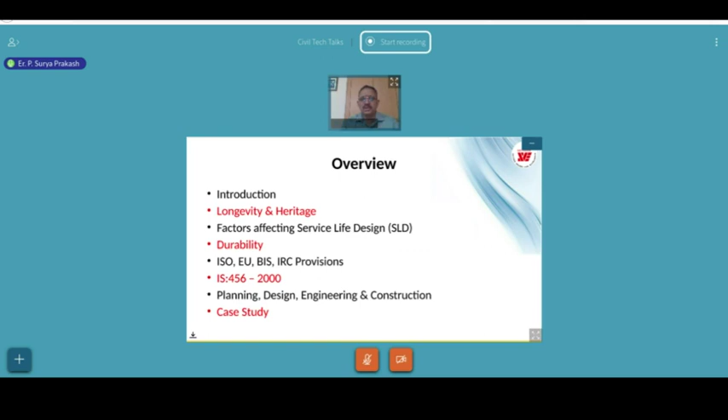That means perfectly being able to design a particular given life of the structures by defining the specification and the structural systems and materials for achieving that lifespan of the structure. This is the challenge before us. So I'll be covering these aspects, and I also give a small case study of a project where we have worked out the specifications, what all to be covered. We have 1 hour time, and I'll try to cover as much as possible in this time.

So early 20th century, when reinforced cement concrete is evolving, 1903 and all, where theory is still not fully developed, people still started constructing buildings in reinforced concrete. We had concrete before that, but reinforced concrete as a concept started evolving in the 20th century, and people got excited with that concept of reinforcing the concrete because people found concrete a strong material for compression, but weak in tension, as we all know.

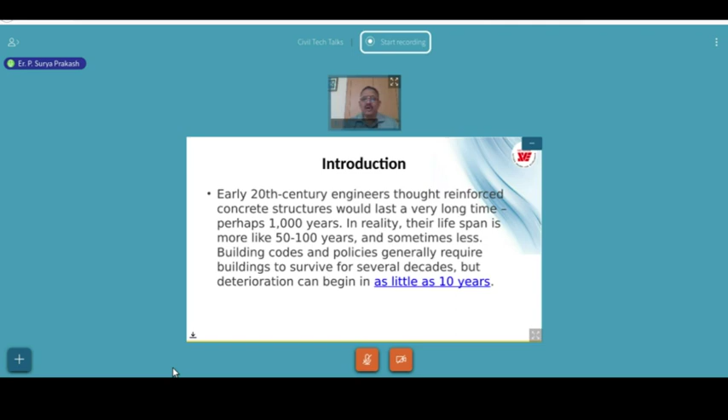Once they got this idea of reinforcing concrete, they thought they could build structures which would live for 1,000 years perhaps. But in reality, we are seeing lifespan is limited to between 50 and 100 years if they are well maintained, and if they are not well maintained, even less than 50 years. And we are seeing many buildings collapsing even during construction without proper construction methods. So today I'll be covering these aspects of the lifespan of reinforced concrete structures.

So what are the structural forms or forces that affect the life of a structure? The oldest structures standing are pyramids, and the pyramid is a natural structure where we have only down thrust, and there cannot be overturning in a pyramid. They are very stable, and load dispersion is by natural means. That's why we have pyramids standing for 5,000 years. And we have stupas in India, temples, which are also close to the pyramid, but taller and more slender compared to the Egyptian pyramids.

But temple construction is so well defined. There is no eccentricity in the construction, and the dimensional stability and symmetry are all predefined, and they do this construction religiously. That is why we see many structures in India also. In fact, if you compare worldwide structures and India, India has almost an equal number of heritage structures standing more than 1,000 years and more than 2,000 years.

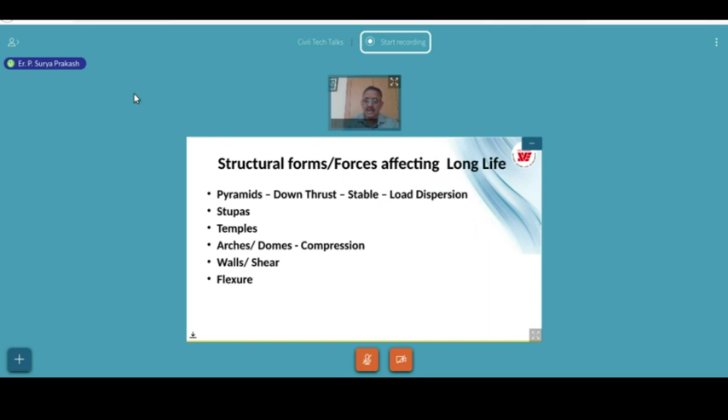Next, coming to the present scenario, in the last 2 or 3 centuries we have evolved structural systems from arches, pure compression systems, dome spatial structures, which are pure in compression because there was no concept of reinforcement. And now the latest, we have very tall structures with shear walls and framed tube kinds of structural systems, which can also handle flexure. The challenge when we handle flexure is handling the crack width in the tension zone, and also the shear. So this is the challenge we have to discuss today, how to design long life for these structural forms and the forces we are estimating.

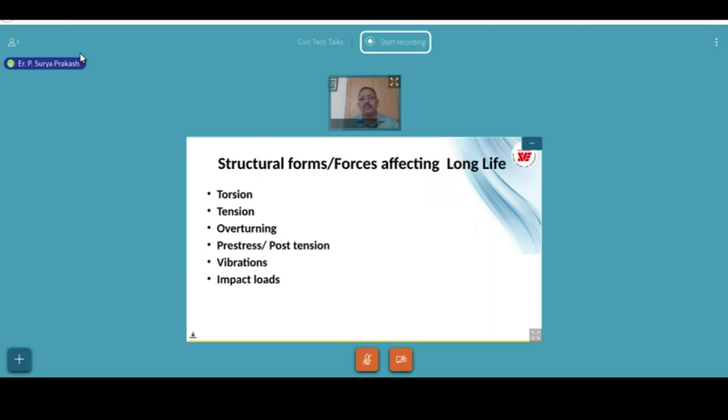As we are advancing, we are also tackling torsion, tension with tensile structures, and overturning moment by anchorages. We have further advanced to pre-stressing and post-tensioning, and we are handling loads from static loads to vibration loads and impact loads. So this is the challenge before engineers: considering all these forces, materials and structural systems, we should still be able to design a life for the structure.

The loads that we deal with are self-weight, imposed dead loads, live loads, moving loads, wind loads, earthquake. And the challenge when we design for a long life is the return period of these loads. We are seeing fast-changing loads, wind, rain or earthquake. The frequency of occurrence of the highest wind loads and highest seismic loads is changing very fast. We had a revision of IS 1893 for seismic in 2002, and now in 2016 it was revised with new provisions.

Imagine a structure designed some 30 years back; it has to be retrofitted. Without retrofitting, how can anybody ensure the life of that structure? And in the current scenario, we have to consider the return period of these 100-year peak wind loads, seismic or rainfall. So the question of reliability comes into the picture in design.

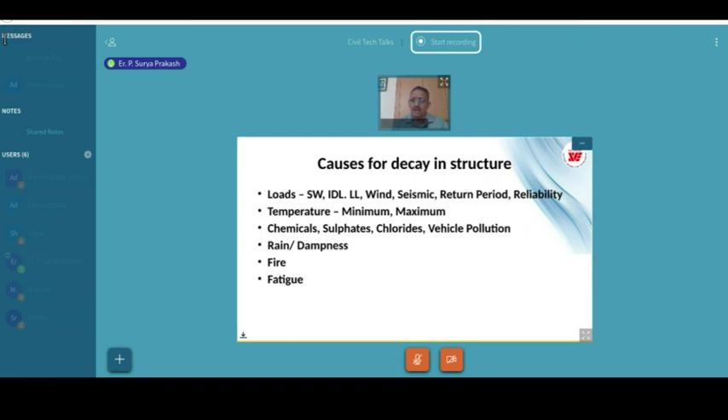And fire. Fire is another incident that can largely affect the life of a structure. Though it comes as an accident, if we are designing life, we have to cater to these accidents. And fatigue from the reversal of stresses due to wind or moving loads also has to be factored in when we talk about the life of the structure.

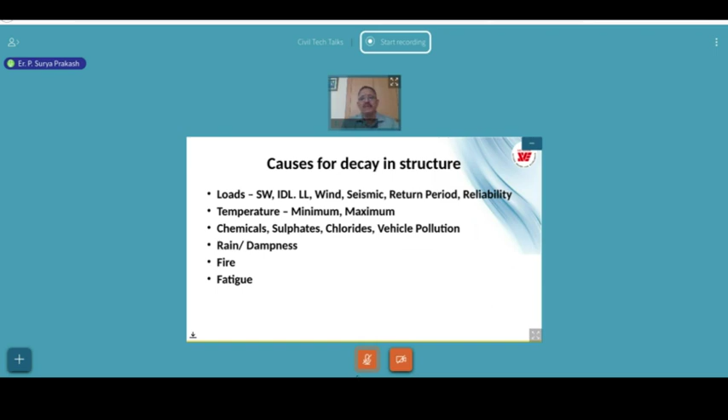Next is soil settlements. We have to take into account the allowable settlements that we consider while calculating the safe bearing capacity, and the creep and shrinkage of concrete. Because we are talking about the life of concrete structures, the effects of creep and shrinkage also have to be accounted for while designing the life of the structure. And a major problem we are seeing nowadays in most buildings is embedded conduits in structural elements, whether columns, beams or slabs.

We have electrical and plumbing lines being embedded, and they collect the water into these conduits, and the leakage of these joints also largely. So this has to be also thought about when we talk about the design life of the structure. And lack of weatherproofing, because we have seen the effect of temperature. So to tackle the effect of temperature, we have to weatherproof the buildings, primarily the terrace, which is exposed, and also the facade, walls or structural elements that are exposed on the sides.

Next important is the soil contamination, and we have to check the level of contamination or possible contamination that can happen during the life of the structure. And earth pressure: in case of deep basements being constructed nowadays, we have to also take care of the earth pressure, variations in the earth pressure, and overburden pressures on the side earth pressure on the retaining walls, because the life of the structure is also dependent on these aspects of containing the dampness entering

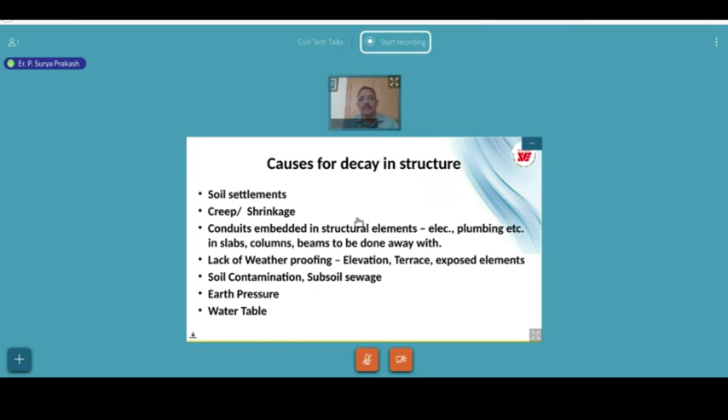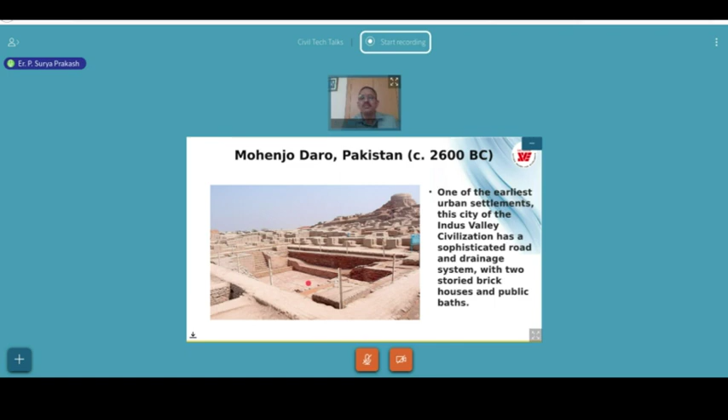So let us examine what are all the factors that could give long life to these structures. Next is Mohenjo-daro, the Indus civilization, 2600. There also they have used bricks and stone in the construction. Because they were buried due to earthquakes or river floods, they have excavated and found this great civilization, which is more than 4,600 years old now. So this is the structure which could withstand. So we can say that masonry structures can also withstand. You can see it is a swimming pool which was constructed.

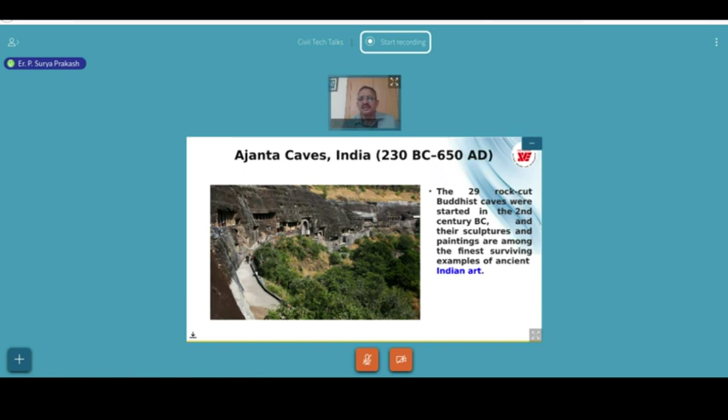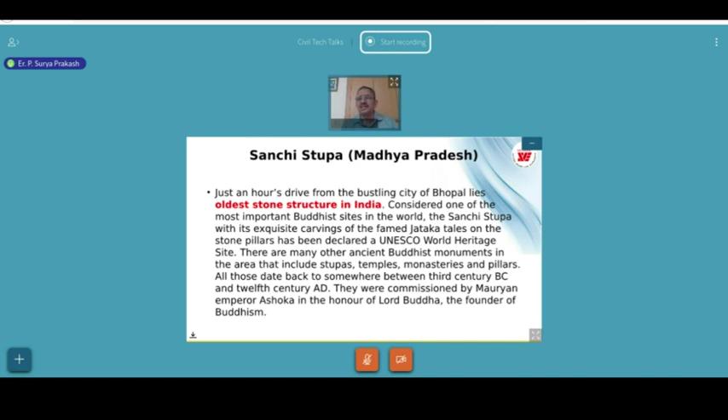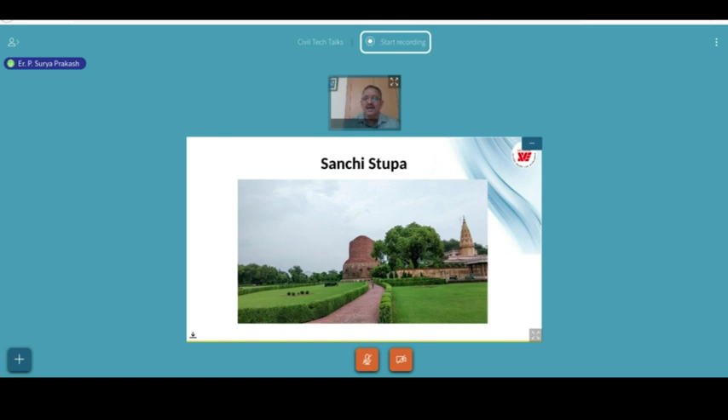That is the Sanchi Stupa in Madhya Pradesh, the oldest stone structure. It is near Bhopal, and it is also a UNESCO heritage structure. So this is the structure. You can see the stupa. It's like a dome and wall kind of construction, which was constructed more than 2,000 years ago. And this is the dome again. This is a beautiful construction that happened more than 2,000 years ago. And it is a Buddhist stupa in India.

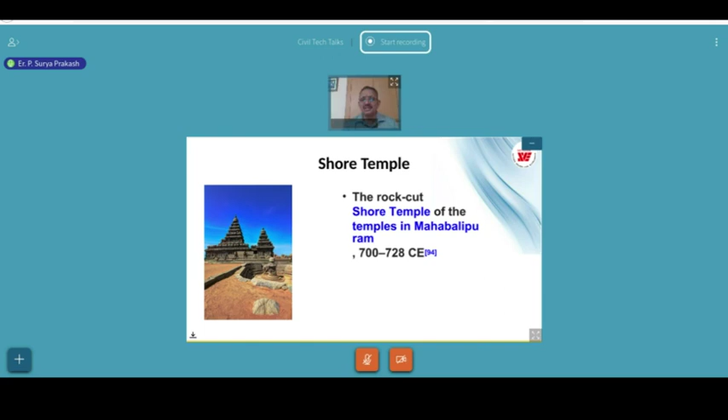Next is the Shore Temple in Mahabalipuram. This is also a single stone rock-cut temple, constructed in the 7th or 8th century period, and is still standing. We also have so many other temples like Madurai, but I'm showing some of the interesting ones, like the Khajuraho temple. This was also constructed more than 1,000 years back.

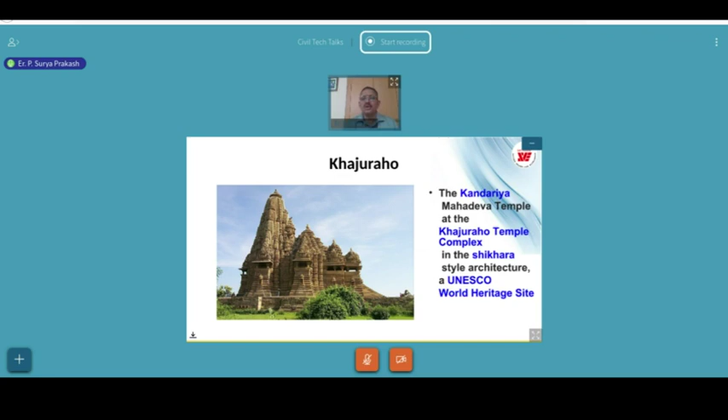Now let us come to RCC buildings, serving life more than 100 years. So what are the structures? The oldest high-rise structure that is standing in the world is Ingalls Building in Cincinnati, Ohio State. It was constructed in 1903. This is a 16-story building in reinforced cement concrete, when the theory of reinforced concrete was still not developed fully, the stress theory and all that, but still they have constructed it, and it is longest standing.

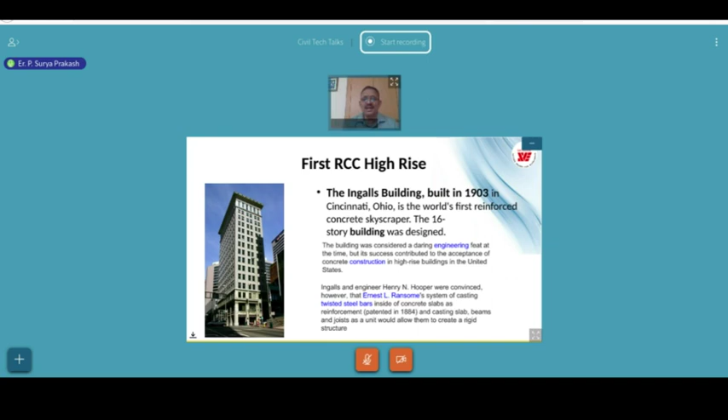So if you want to think of a reinforced concrete building which is living for more than 100 years, this is the best example which we have. And they have done the reinforcement in a different way. What we detail now is not the method they have followed. I will use the word crude way of reinforcing the concrete they have adopted, but still it is standing more than 115 years.

So this is the first RCC high-rise building, with column sizes of 760 mm or 30 inches. And the amount of concrete produced during construction those days was 76 cubic meters in a 10-hour shift. Now we are able to produce this kind of concrete in 1 hour, but definitely it may not be of that quality.

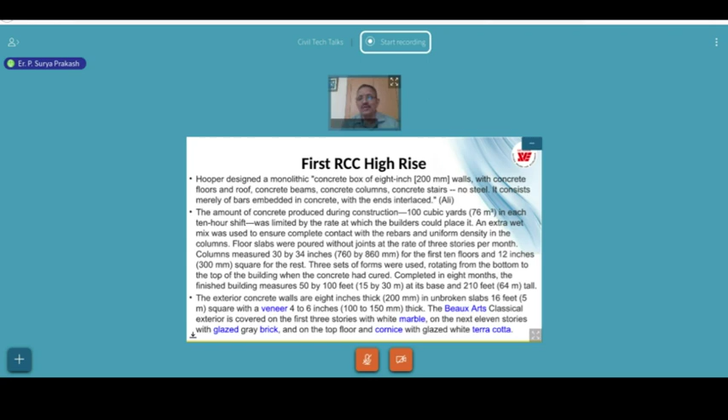So now let us look at what is service life design. Service life design in India, what are the Indian codes that we have, and what are the factors affecting it. Climate change: that's the challenge for engineers, to predict what the climate condition is going to be after 20 years. It could be better, it could be worse, because IPCC is working on improving climate change, but still we have to keep our fingers crossed to see to what extent we are going to damage our environment or improve it, or bring it back to the original state of 50 years back.

And probability is the biggest thing in estimating the life of a structure. So we have to estimate the deterioration in the quality of concrete, deterioration of the reinforcement by corrosion, the materials we are using, whether aggregates, fine aggregates, coarse aggregates, or cementitious materials, and the technology we are using for construction. That is very important, because the quality of concrete depends on the method of mixing, transporting, placing, compacting, and curing, all these steps. That is the most vital element in design life or service life design of the structure.

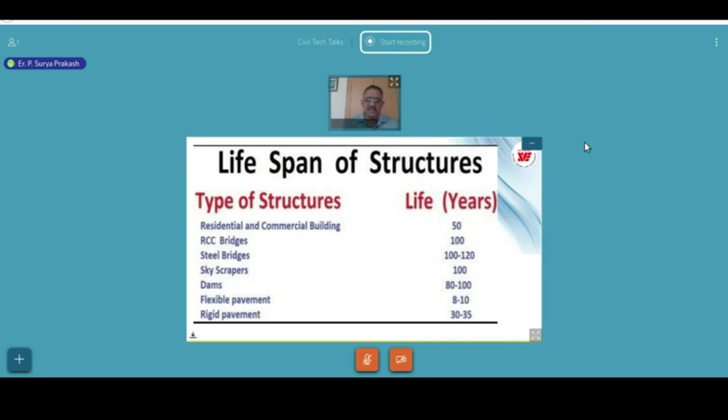And fortunately, the Bureau of Indian Standards is revising IS 456 to incorporate the service life design of the structures. So the design life or design service life or service life design of a building or other structure or components is the period of use as intended by the designer, after which it may need to be replaced, or before this period has lapsed, it should remain fit for purpose. Fit for purpose means if I have designed a residential apartment, people should be able to live in that apartment without leakages, without cracks, without an unsafe feeling in the structure.

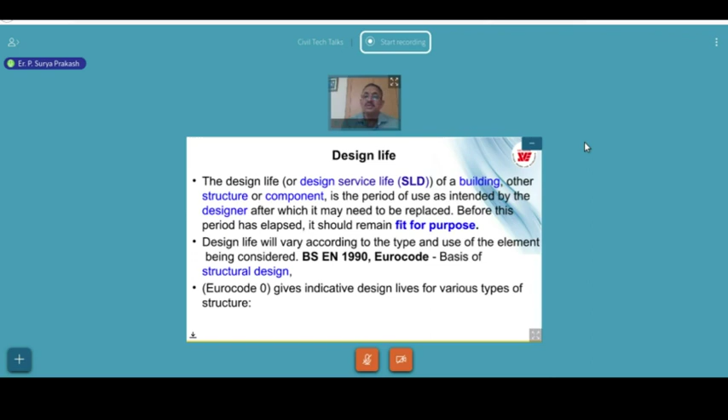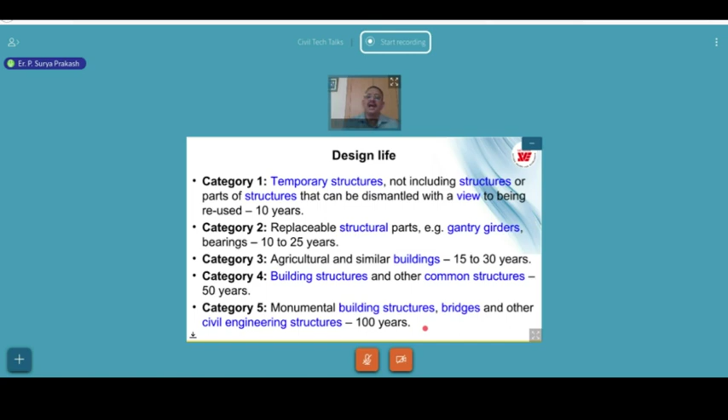The factors affecting design life. The design life may be affected by environmental factors such as moisture, humidity, and rain. These are considered in our IS 456 at present in the exposure conditions: mild exposure, severe exposure, extreme exposure, and all. Next is the wind, the kind of wind loads, the frequency of occurrence of these wind loads, and then temperature; the expansion joints or contraction joints that we provide in the structures and the treatment of these expansion joints also affect the life of structure. And the pollution: air pollution, the quality of air, the pollution in the water in the subsoil, the pollution in the soil.

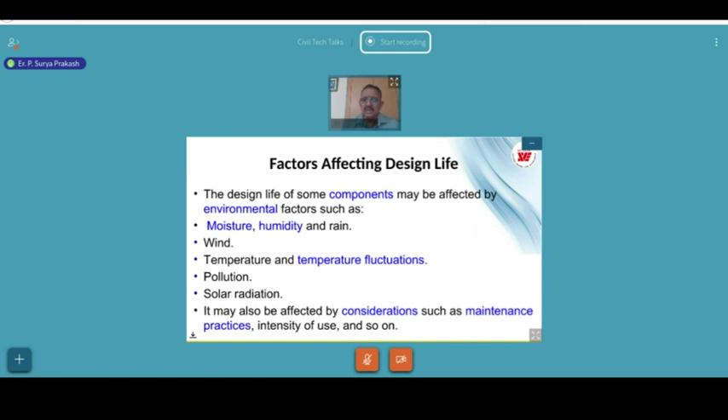And the next important factor that affects is solar radiation. All these we are not considering in the design, but considering the grade of this pollution or grade of solar radiation, we have the provisions for providing cover or quality of material that we decide based on these factors, so that we will extend the life of the structure. It may also be affected by considerations such as maintenance practices, intensity of use, and other factors. So this is what affects the design life.

Who guarantees design life of a structure? Is it the engineer? Is it the builder? Or is it the contractor? Or is it the user? In fact, it is a combination of all. There is no legally agreed definition of design life. In fact, there is not even a legally agreed definition of design. So if it is to be included in contract documentation as a performance requirement, that is a performance guarantee, we have to incorporate it in the contract. So it is important that it is carefully defined within the contract document and that it is consistent with all other requirements of the contract documents.

So in the contract, if we say that this structure has to live for 100 years, as designers, as planners, we have to define the specifications and construction methods that will ensure the life of structure. And apart from that, we must put conditions in the contract such that the documentation of the quality is maintained as envisaged in the design life. And then post completion of construction, during the handing over, the life of structure can be ensured only by proper maintenance, periodic checks, and monitoring of the structure.

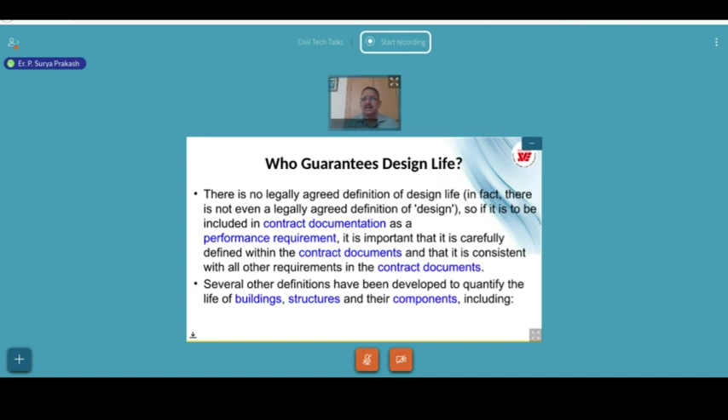So there are many other definitions for quantifying the life of buildings or structures and their components, including required life. What is the required life of a structure? Let us talk about it.

Suppose an independent house where we live. We are seeing technology is changing so fast, and the appliances are changing, automation is changing. So what is the minimum required life of the structure? And what is the cost of structure versus other things? Is it viable to design a structure like if I spend 800 rupees per square feet for the structure, is it worthwhile spending another 400 rupees to extend the life of structure to 100 years? Is it worth it? So what is the required life that we have to define?

What is the technical life of structure? That is serviceability requirement. We have limit of serviceability.

Functional life again is linked to serviceability, but the limit state of serviceability is only the design. When it comes to functional life, there should not be rainwater dripping, there should not be sunlight directly coming into the building. That means the roof has to be intact. The flooring has to be at proper level, with slope so that dampness and water will flow. All this maintainability, that is the functional life.

What is the economic life of the structure? So that also we have to define. And what is finally service life? Service life is from the day we hand over the structure to the user to the day we decide to dismantle the structure. That is the service life.

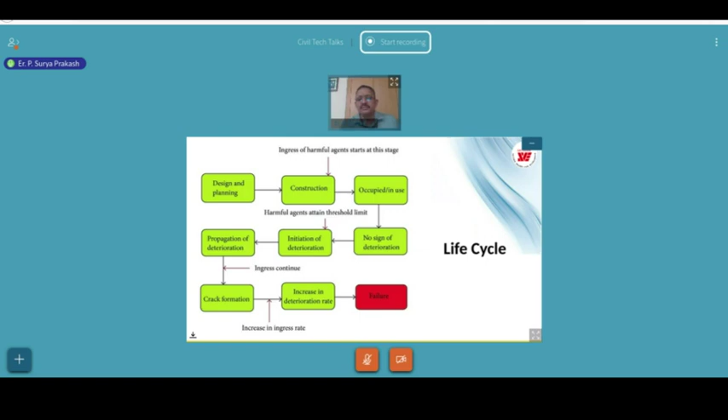So what is service life design? We always say that it is probabilistic. We cannot define, saying I will design this building for 55 years - not easy. I'll design this building for 96 years - it is as good as predicting human life. Nobody predicted the pandemic, and now we are seeing how uncertain life is.

And similarly, for structures also, uncertainty like earthquakes is one of the biggest factors. Cyclones we are seeing too - in the last 20 years, we have seen in Hyderabad city 7 incidents of highest rainfall, which is higher than the 100-year rainfall benchmark by 20%. In 100 years, if there are normally 3 incidents of peak rainfall, in just 20 years there have been 7 incidents of peak rainfall.

The peak is 20% higher than the peak of 100 years ago. So frequency increased 10 times, intensity increased 20%. You can see the change of climate, because of the number of cyclones that are happening. Wind incidence is also increasing, and rainfall incidence is increasing. It has many effects - we have seen many buildings and walls collapsing due to these rains.

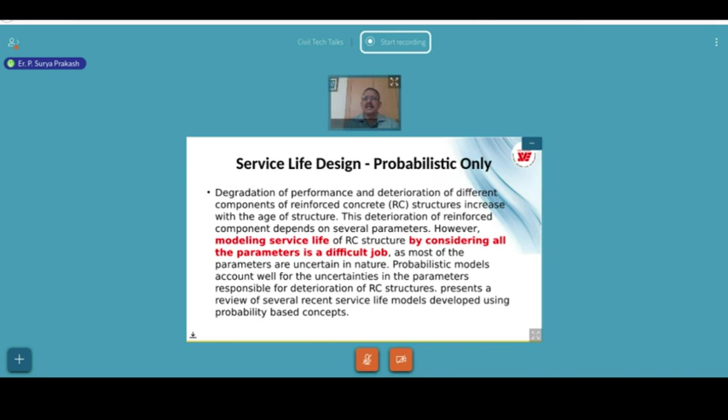So to extend this life, we have to start monitoring from this stage itself. So if you have every 5 years maintenance for the structures, we have to tell all the apartment owners, all the building owners, all the building maintenance people or facility management people to have the building health checkup and to have the pre-monsoon checkup of the building.

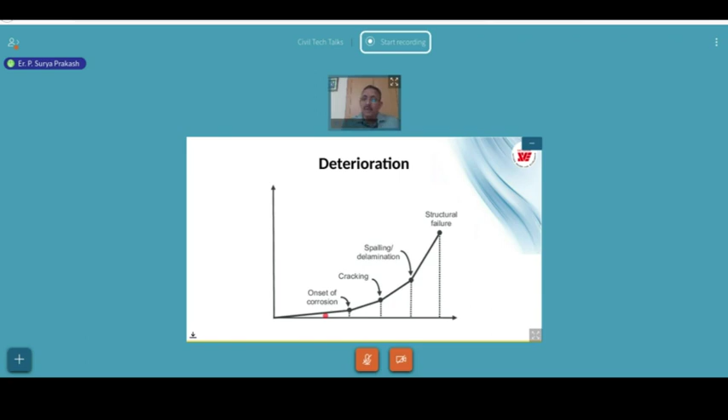Oh, it is better. Oh sorry, I should use the full screen. I'm sorry. Yeah.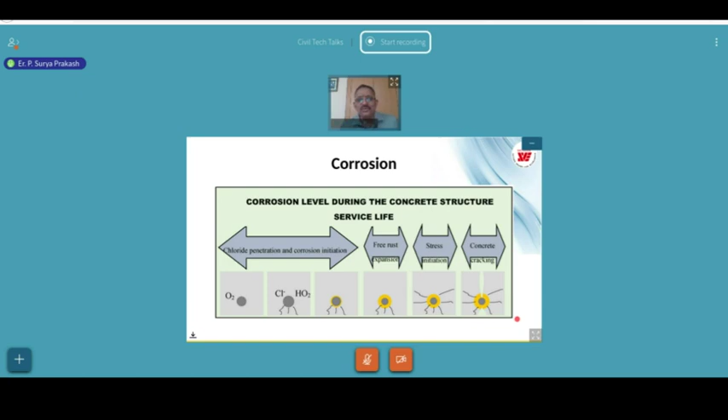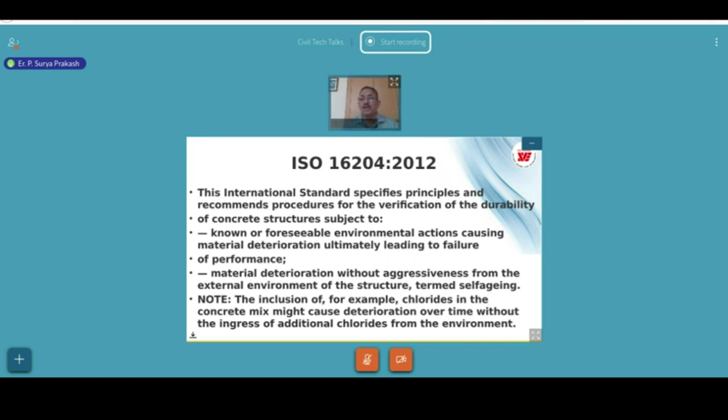So next, for service life design, the only document readily available is ISO 16204, which was formulated as late as 2012. Before that, there was no document. You can do the service life design based on this - it specifies principles and recommends procedures for verification of durability of concrete structures subject to known or foreseen environmental actions causing material deterioration, ultimately leading to failure of performance. And material deterioration without aggressiveness from the external environment of the structure is termed self-aging. The inclusion of chlorides in the concrete mix might cause deterioration over time without the ingress of additional chlorides from the environment even.

It is further required that the designer shall communicate a maintenance plan. As I mentioned, without maintenance, no designer can guarantee the life of a structure. So the maintenance plan is very important to the organization that manages the structure. This plan shall give instructions on those activities that have been assumed during the design.

As I mentioned, the protective coatings for the concrete, the cover portion that we consider, and any cracks due to external aggressive environmental factors that are not considered in the design - or even if they are considered, the prediction of exact deterioration level due to these environmental factors is very difficult because of construction quality. So unless we do inspection and check periodically at all the critical points, it is not easy to extend the life of the structure.

So activities like general cleaning, ensuring that the drainage system works, application of sealants at regular intervals, expansion joints particularly. Since the reliability level on which the verification of the design is based is chosen on the basis of possible consequences, if the structure does not stand the relevant local standards, that is very important. ISO doesn't give guarantee across the globe for the design, because in India itself we have 6 climatic zones.

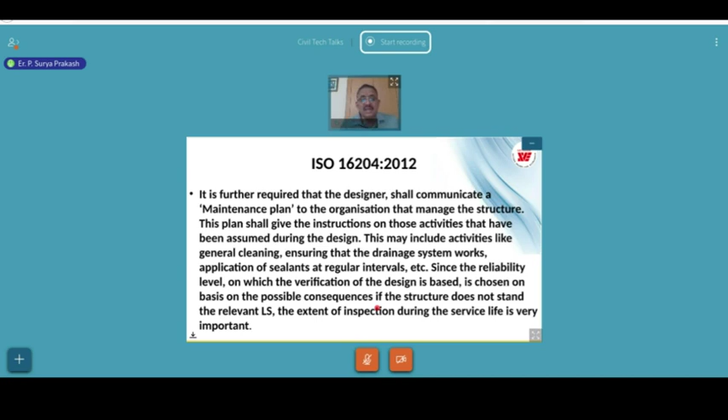We have northeast, north, south, the western coast and eastern coast, with different temperature, humidity, rainfall and snowfall. All these factors have to be considered while designing the service life of the structure. If the structure is subject to frequent in-depth inspections by qualified personnel, deficiencies will be noticed early, enabling strengthening and repair of the structure.

If, on the other hand, the structure is not subject to any inspection, like foundations, the possible consequences will be much more severe.

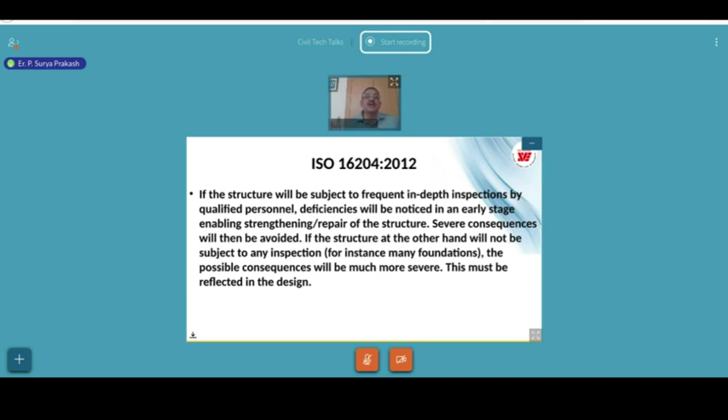So inspection is conformity evaluation by observation and judgment, accompanied as appropriate by measurement, testing, or gauging. This implies both gathering information and data from the structure as well as conformity evaluation against some requirements. ISO 16204 assumes that the designer communicates to the operator the level of inspection, which in the design is based on the inspection plan, comprising ISO FDIS.

So what types of inspection are required? What components of the structure are to be inspected? Frequency of inspections, performance criteria - as I mentioned, 5 years is the minimum frequency - and qualification, structural stability evaluation, because codes are changing, climate is changing. We have to document all these results and actions in the event of non-conformity with the performance criteria. Like in Japan, post-Kobe earthquake, all structures were retrofitted for vertical acceleration.

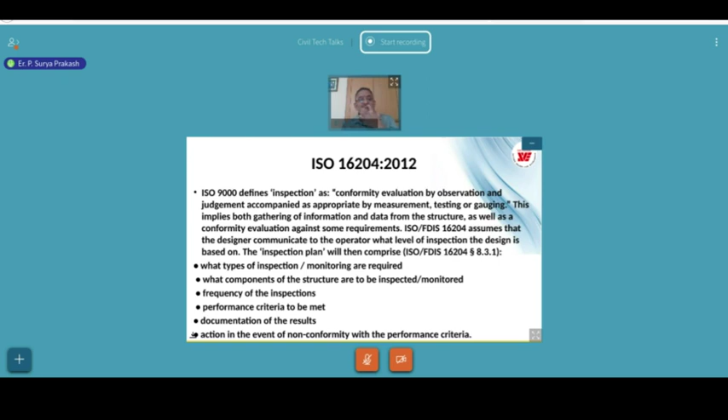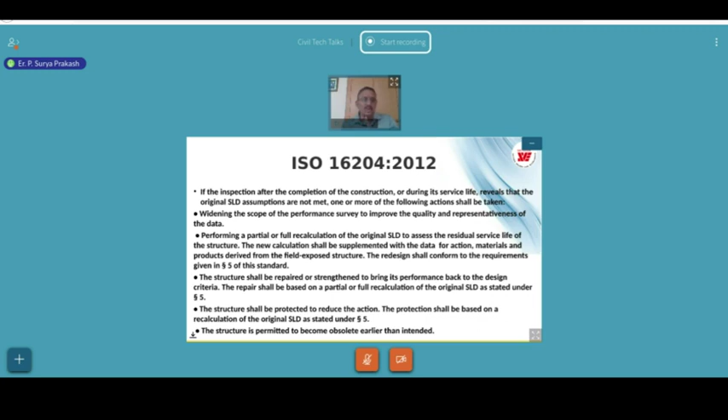In India, we have had 3 codal provision changes. Tell me how many buildings would have been retrofitted as per the latest codal provisions to extend their life. People cannot complain about the service life of buildings unless we do the retrofitting based on revised codal provisions. Even concrete - we now say minimum grade is M25, but all old structures were constructed with M15 grade. So we have to retrofit the concrete, and the cover also needs to be retrofitted based on the exposure conditions of the structure.

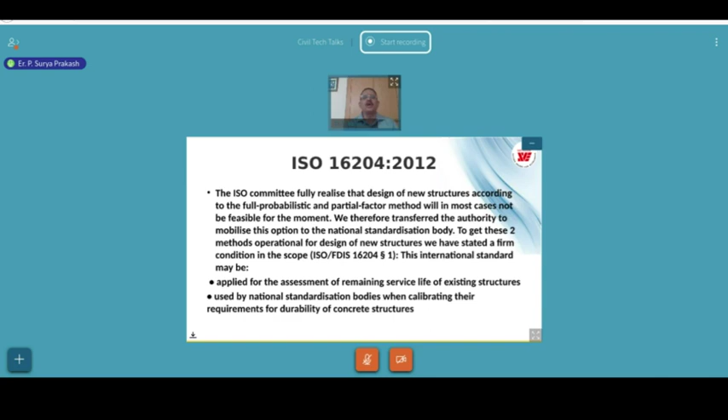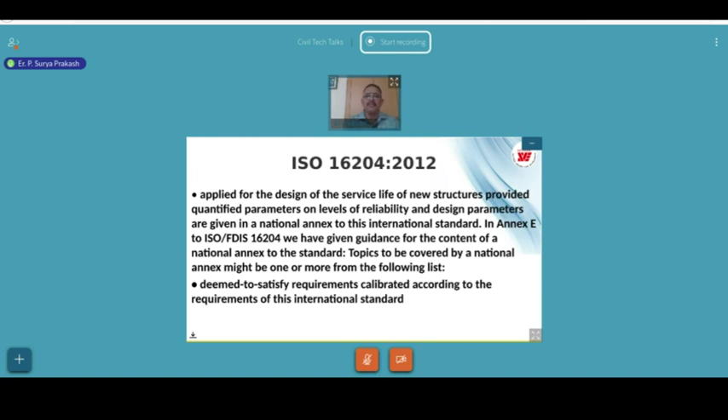I'll try to move faster because of time - we're running short, and very important points remain. I'll cover them. You can refer to ISO 16204, a very important document for service life design. I'm only covering the important aspects of these design parameters, and will give an abstract of all these things in my last slide, so I won't go into full details. The main thing is deemed-to-satisfy requirements, calibrated according to international standards and also local standards.

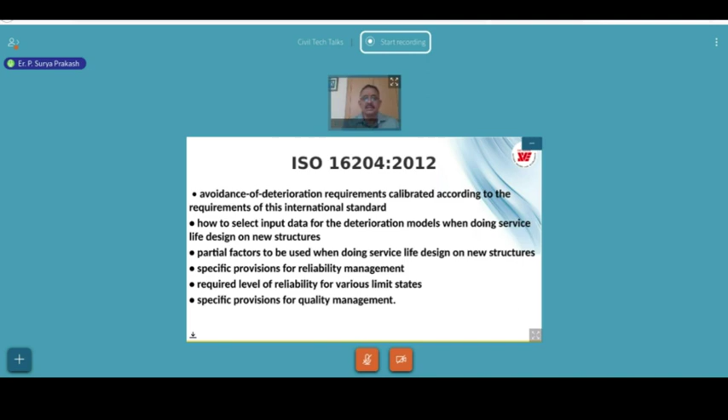Next, what does durability talk about? As I mentioned, it is only prescriptive - nowhere in IS 456 does it say that the life of a structure is 50 years. But from the reliability coefficient we take in IS 875 or 1893, the K1 factor, we can imagine that depending on the return period of the maximum life while calculating the probability coefficient K1, normal structures and important structures are designed for 100 years.

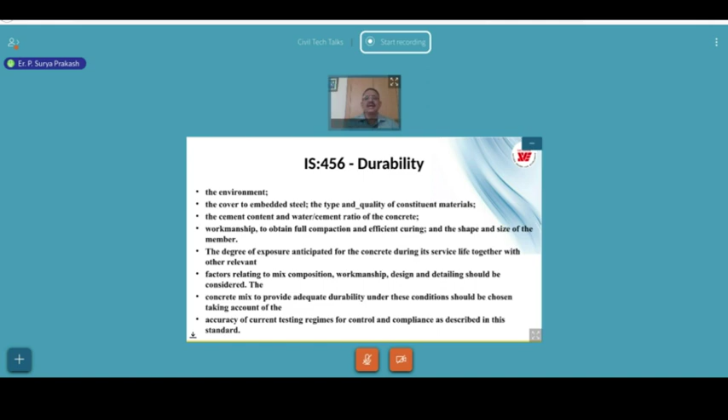So the durability criteria of IS 456 talk about concrete cover, chloride penetration, and minimum cement consumption prescribed depending on exposure conditions. These are all durability provisions - materials, the cement content and water-cement ratio of concrete, workmanship to obtain full compaction and efficient curing, and the shape and size of members - minimum column size, minimum beam size, minimum slab thickness, minimum cover provisions - and workmanship and design detailing should be considered as per codal provisions.

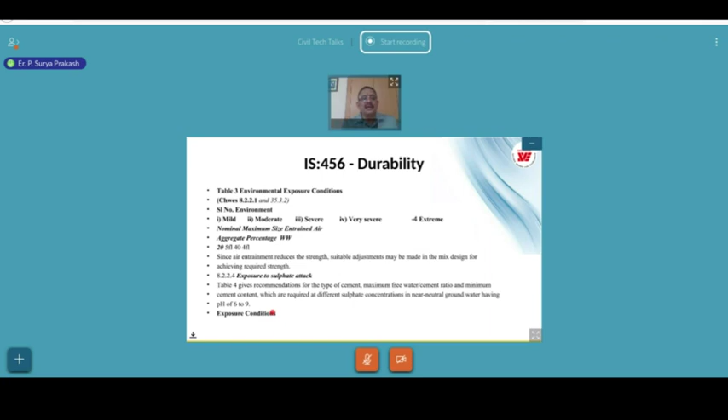Shape and size of the member, exposure conditions - general environment exposure conditions are defined as mild, moderate, severe, very severe, and extreme. The minimum cover to any structural element is 20mm, increasing by 5mm for each higher exposure condition. The nominal maximum size of entrained air, that is porosity, is another important factor, and the pH value of water used in concrete must be maintained between 6 to 9, along with exposure to sulfate attack and other exposure conditions.

So what are the exposure conditions? Concrete surface protected against weather or aggressive conditions - it's good to have protective coating on exposed concrete and foundations exposed to soil, particularly in coastal areas. Concrete surfaces sheltered from severe rain or freezing while wet, concrete exposed to condensation, concrete continuously underwater, concrete in contact with or buried under non-aggressive soil, and groundwater concrete surfaces. Based on these exposure conditions, the requirements for cover are defined.

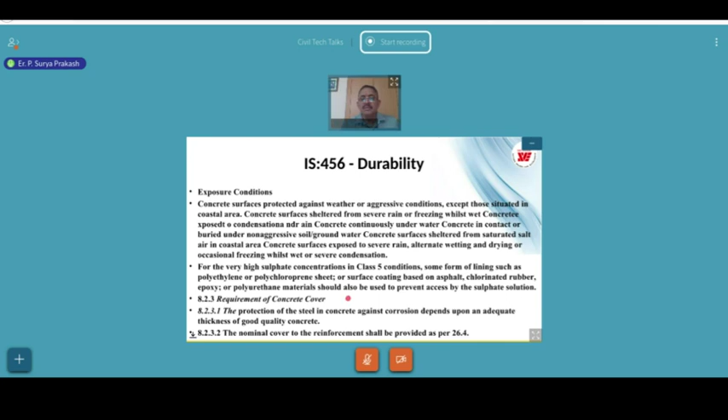So you are all very well aware of this. So what are all the most severe conditions? Concrete completely immersed in seawater, concrete exposed to coastal environment, concrete surfaces exposed to seawater spray, corrosive fumes or severe freezing conditions while it is wet, concrete in contact with or buried under aggressive subsoil groundwater, surface of members in tidal zone, and members in direct contact with liquid or solid aggressive chemicals, factories.

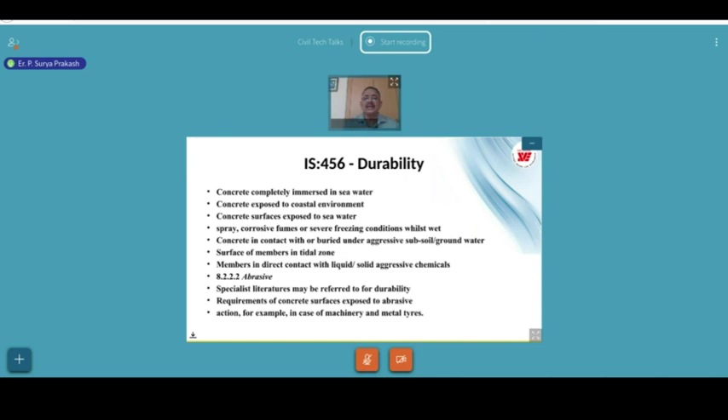This is in factories, this will happen. And abrasive: specialist literature may be referred for durability of abrasive structures. That means vehicular traffic and all that. And requirements of concrete in industrial floors exposed to abrasive action, for example, in case of machinery, metal tires and all that. Freezing and thawing in low temperature, lower than M50 grade is used under these conditions.

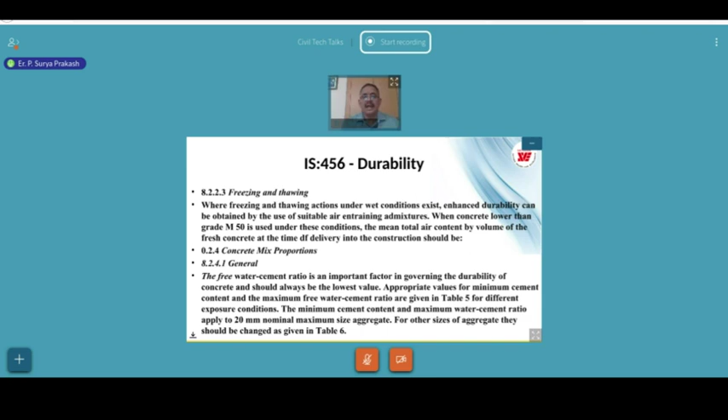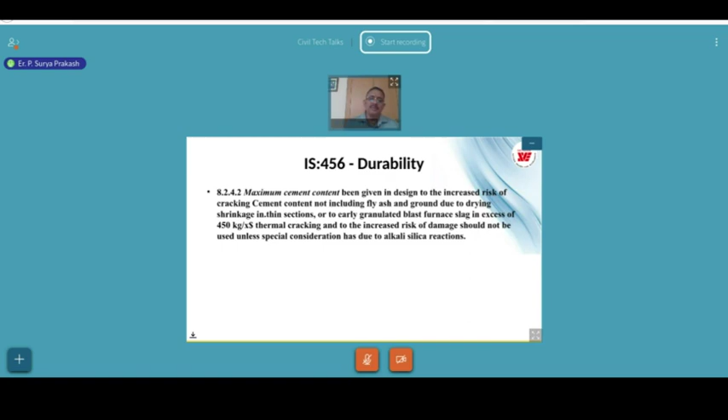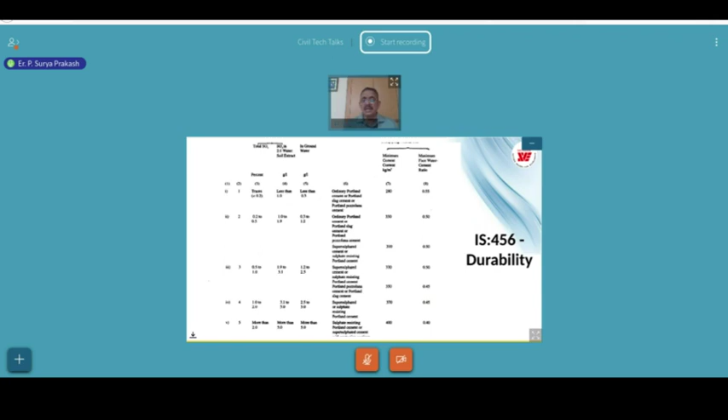So these are the tables that have given the groundwater and then sulfates and chlorides, and minimum cement content and maximum water cement ratio. So these are the levels. Water cement ratio is no more a challenge nowadays because we are able to contain this in the mix design by considering the plasticizers and super plasticizers and flow mix kind of thing.

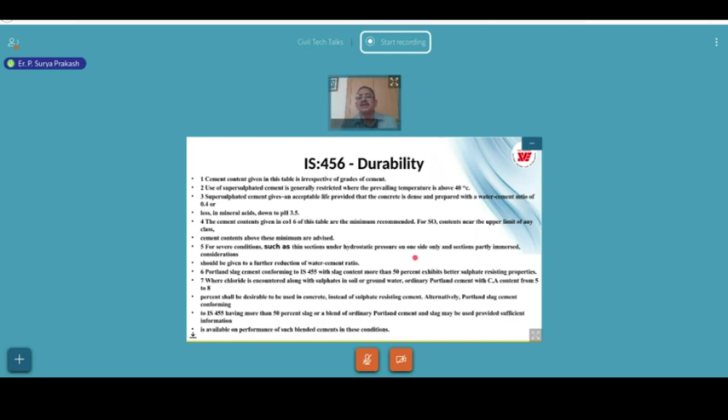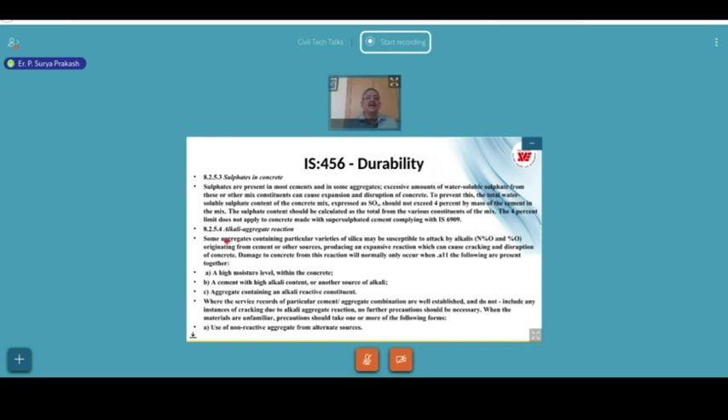So these are the notes given to the table: where chloride is encountered along with sulfates in soil or groundwater, OPC with tricalcium aluminate content from 5 to 8 should be used. For severe conditions such as thin sections under hydrostatic pressure on one side only, or a section partly immersed, considerations have to be made. So these are all the provisions of IS 456 durability criteria for taking care of chlorides and sulfates in the concrete, and alkali aggregate reaction. These are all the things we should understand while doing the mix design of the concrete.

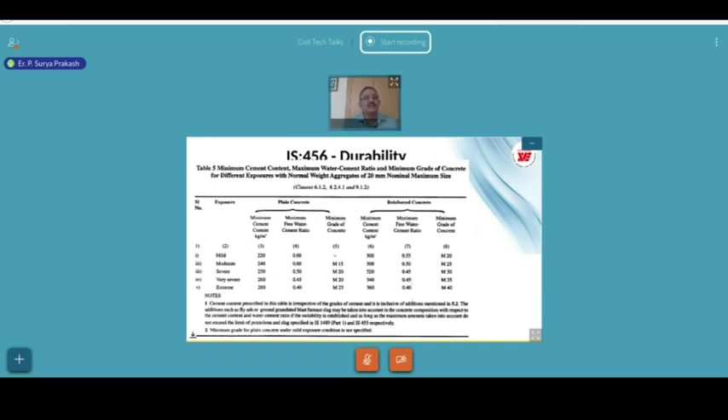So finally, the minimum cement content for plain concrete and reinforced concrete, we should follow these provisions. And this is for the sake of students I'm showing, because we should be clear and aware of what are these durability provisions of the existing code, which is going to be revised very soon. But these are all prescriptive only. By following this, you cannot give guarantee that the structure will be safe for 50 years. It is subject to all the maintenance and other considerations.

Next important document that in India we have is IRC Special Publication 60, in which all the bridges that we design are designed for a service life of 100 years. But even these provisions are prescriptive and predictive only. We can only predict that yes, this structure will stay for 100 years subject to these conditions. So it is all a qualified statement about the life of the structure.

I'll skip going into this document. You can refer to this; it is available online. I'm not opening this document, but it says when you do the maintenance, you bring back the original position of the structure and again extend the life. Again, you do the maintenance and bring back the original condition of the structure. That's how you have to give the 100 years. You cannot give guarantee unless you have at least 3-4 periodic checks and rehabilitation or restoration of the original condition or design condition of the structure.

So now I'm talking about, in fact, a practical challenge that I had to face. One of the clients asked me to design the building for 150 years life. So I was searching everywhere. I could not find a solution to definitely design a structure for 150 years life. So then I started working on all the specifications, how I can ensure 150 years life.

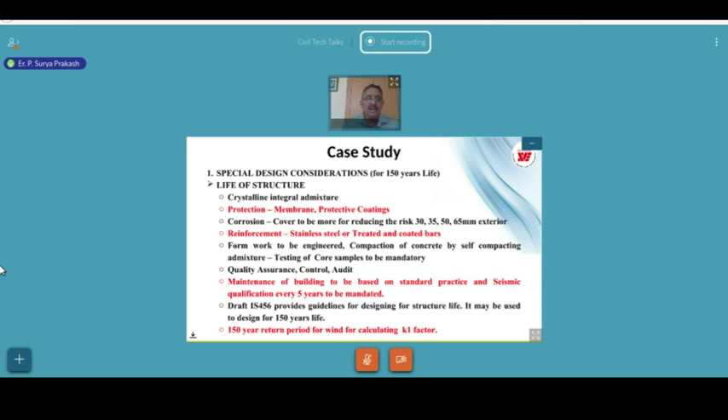Quality assurance, control and audit plan, and maintenance of the building to be based on standard practice, and seismic qualification every 5 years to be mandated. The draft IS 456 provides guidelines for designing structures. It is still in the development stage, but we are going to get an IS 456 revision for the life. And a 150-year return period for wind for calculating K1. That means we have to take the probability reliability factor to estimate the probability of the peak wind occurring during the 150 years of life.

Next is high performance concrete. It's recommended for 150 years, because even for infrastructure projects like metro or bridges, we use high performance concrete for 100 years. For 150 years we have to have high performance concrete, and preferably higher compressive strength, not for the sake of strength, but because with higher strength the porosity will be reduced. Reduced porosity helps reduce chemical attack and the initiation of deterioration by corrosion. High performance concrete is quite brittle, but introducing fibers can improve ductility, and high durability of the concrete has to be ensured.

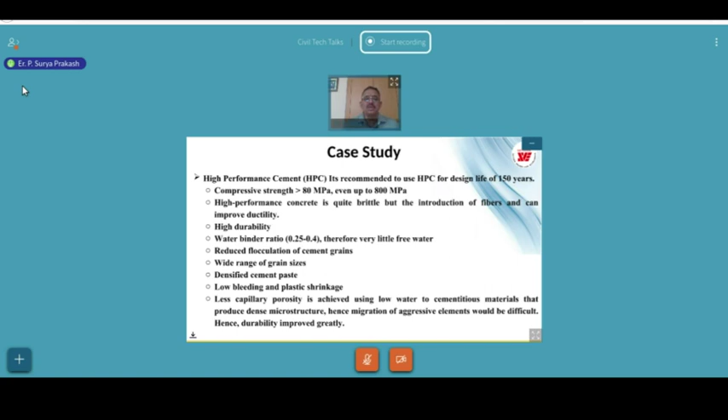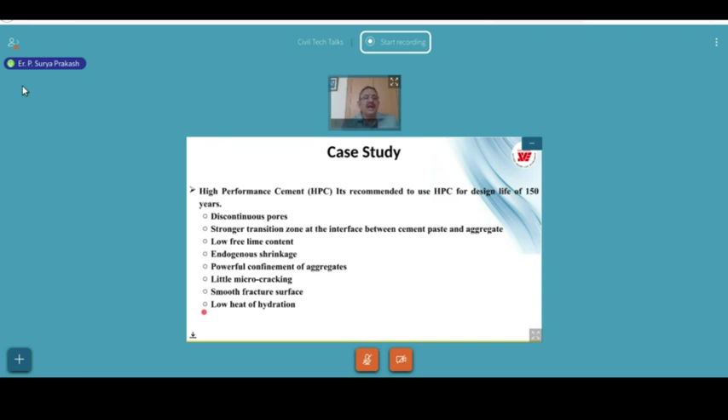Water binder ratio, again the same, reduced flocculation of cement grains, wide range of grain sizes, densified cement paste, low bleeding and plastic shrinkage. Less capillary porosity is achieved using a low water to cementitious material ratio that produces a dense microstructure, hence migration of aggressive elements would be difficult. High performance concrete has discontinuous pores. This is very important, this is the design mix criteria. Stronger transition zones at the interface between cement paste and aggregate, low free lime content, endogenous shrinkage, powerful confinement of aggregates, little micro cracking, smooth fracture surfaces, and low heat of hydration. These are all the parameters.

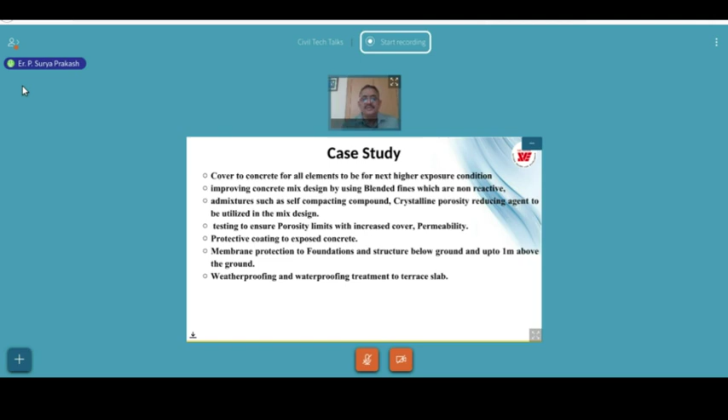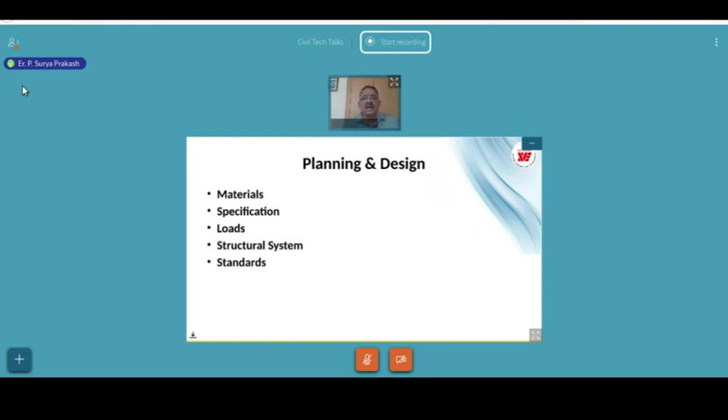The cover to concrete for all elements to be for the next higher exposure condition. Improve concrete mix design by using blended fines, which are non-reactive. Admixtures such as self-compacting compound and crystalline porosity reducing agent, testing to ensure porosity limits, increased cover, permeability, protective coating to exposed concrete, membrane protection, and weatherproofing and waterproofing to be maintained for all exposed surfaces. So materials, specifications, loads, structural system, and standards: these are the parameters we have to cover while planning and designing for longer life.

And mechanization in construction, meaning quality assurance should not be manual dependent or skill dependent. It should be mechanized. Material handling, rigid monolithic construction is what I advise for longer life. The cycle time of construction also has to be maintained based on good construction practices. Precast will also come in handy because the quality of concrete can be controlled in a controlled environment.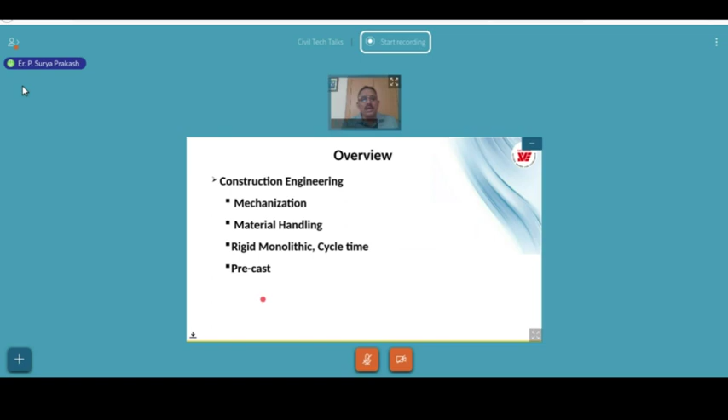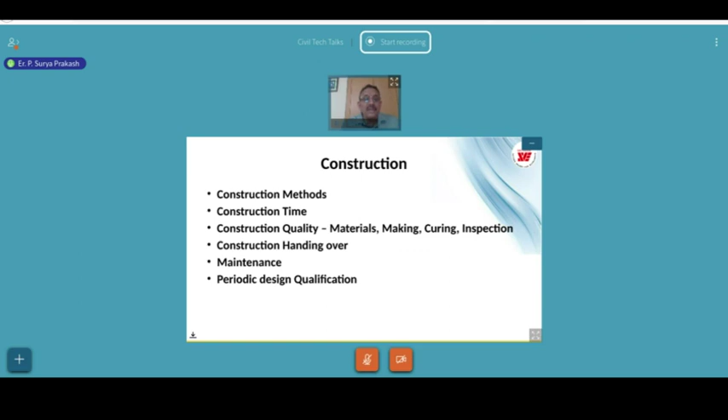And construction methods, construction time, and materials, making of concrete, curing, inspection, and construction handing over with proper documents, and maintenance and periodic design qualification. So service life modeling and service life design are related. They both involve durability performance of structure over its design life.

And predictive models need to be linked to code standards, either implicitly by being incorporated into them or explicitly by being accepted as suitable models for design that link with the design code requirements. Practically, real progress will occur only with formulation and ratification of design codes and standards.

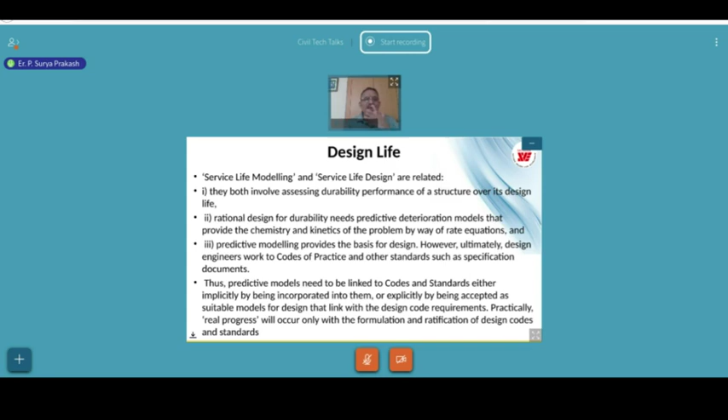So there is no design code readily available internationally also. It is still in the codification stage. That's what I'm trying to say. So the engineering community has to work to speed it up so that we'll be able to design. And codification of service life design.

Service life design categorizes approaches to service life as full probabilistic, partial factor design, deemed to satisfy, and avoidance of deterioration. We can only reduce the deterioration so that the expected life can be achieved. But you cannot guarantee that this structure will stay. So it is still prescriptive and predictive. And we have these models, software like DuraCrete and Life-365, which can be used to predict only.

So the life of a structure is location specific. So every engineer planning, designing and constructing has to work on that particular location's parameters and the site measurable durability parameters. That is the environment quality, the soil type, the water used, and materials that are available.

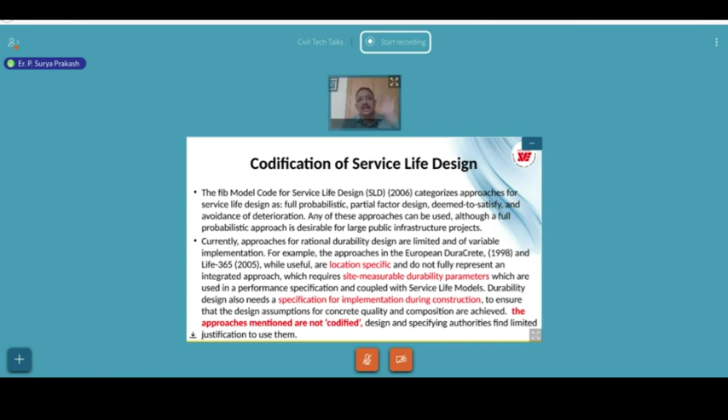Specification for implementation during construction, and the approaches mentioned are not codified. Still, they are not codes actually. So it is still in the development stage internationally also. So we have the limit state method, like limit state criteria. Limit state itself is probabilistic, as we all know, and a defined service life and deterioration models and compliance tests. This is very important during the life of the structure, maintenance and repair strategies, and the quality control systems. Only they can ensure the service life of the structure.

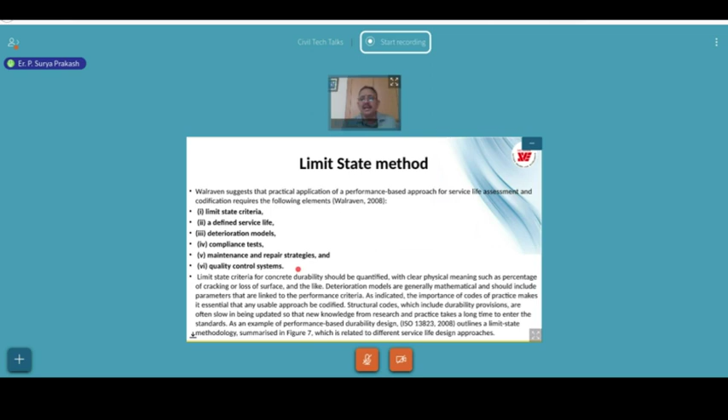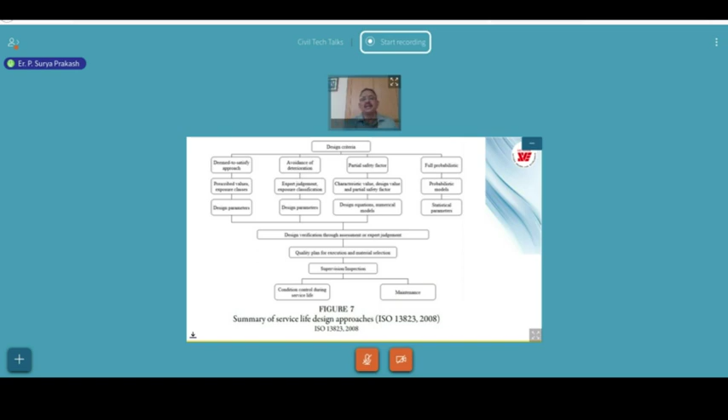So this is the avoidance of deterioration, partial safety factors that we use, and full probabilistic models, statistical parameters, and deemed to satisfy approach. So this is the only thing that will give the service life, and supervision, inspection, and condition control during service life and maintenance of the structure. These are the important parameters to ensure the life of the structure.

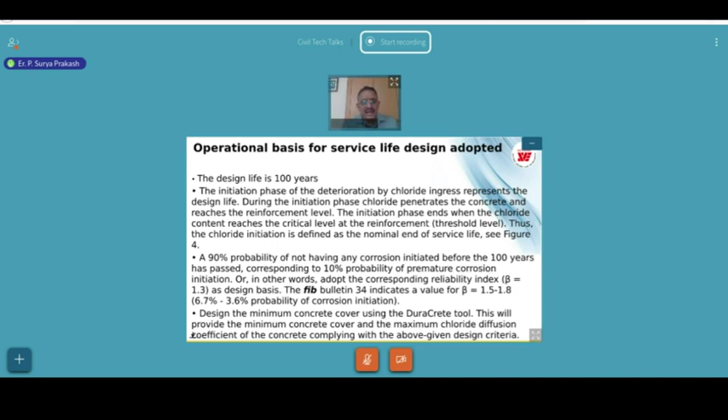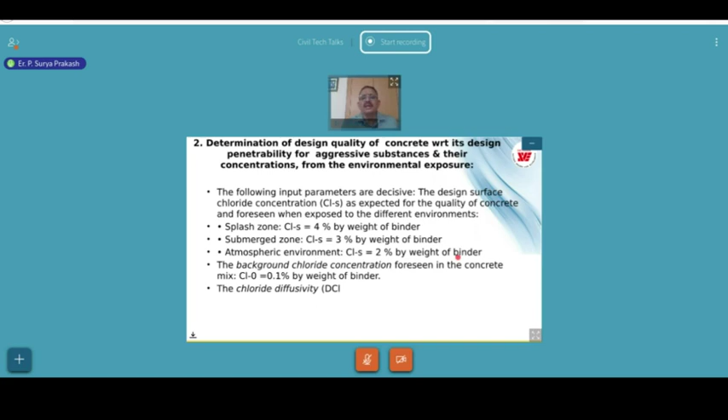So operational basis for service life design adopted. This is again the fib model. Again, this will only come up with the formulae that are used for arriving at the cover, arriving at the porosity levels, and this is the chloride percentages in the splash zone near the sea, and you can see 0.1% by weight of binder. Chloride concentration foreseen in concrete mix, and chloride diffusivity, and these are all the factors as per the European experience.

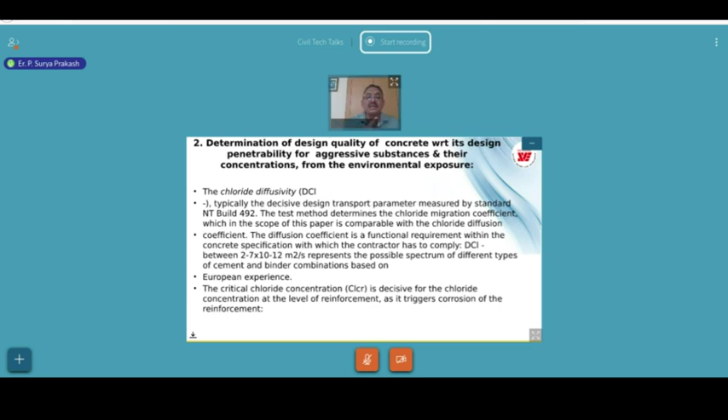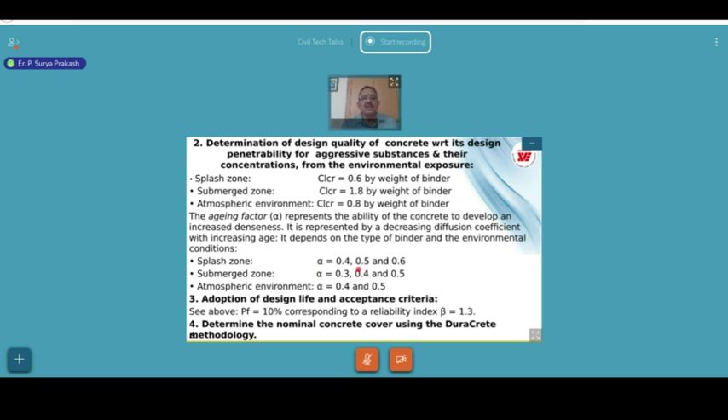So we don't have, even in Eurocode, a definitive design parameter for ensuring or guaranteeing the life of structure. So again, these are all prescriptive only. So chloride concentration and the aging factors also are calculated based on the exposure conditions. And finally, we calculate the nominal cover that is required to achieve these parameters only.

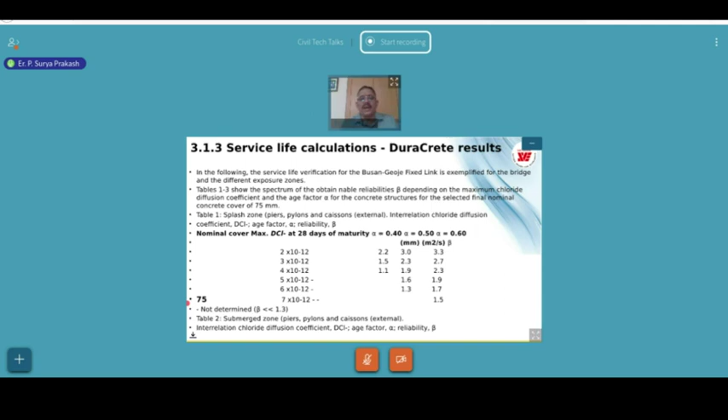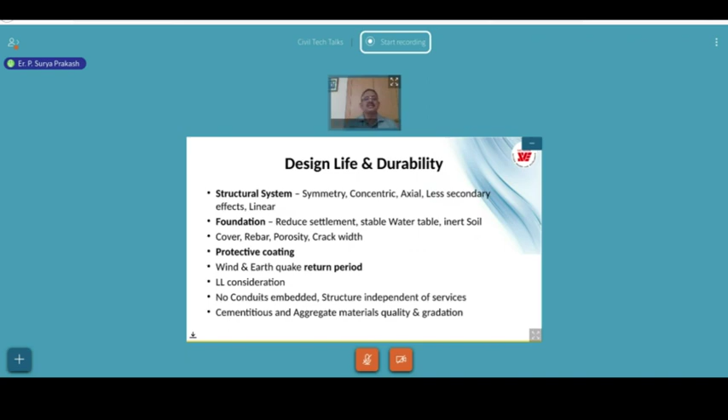No conduits embedded, because you can't predict what is happening inside if you have electrical conduits or plumbing lines inside the structure. And the structure should be independent of services. You provide ducts in the planning if you really want a long life for the structure. Cementitious and aggregate materials quality and gradation. These are the important factors. So I hope I have covered as much as possible. I have opened the subject.

It is really a lot of eye-opening for me also as an engineer. I have chosen this topic because I was asked by my client to design for 150 years, for which I am in a blank condition, actually. Very difficult to achieve because there are no codes. When there are no codes, you can't convince any approving authority without code to give a certificate for the 150 years life. So this is a challenge before all the engineers, and we all have to work for it to achieve the objective of designing service life for the structures.